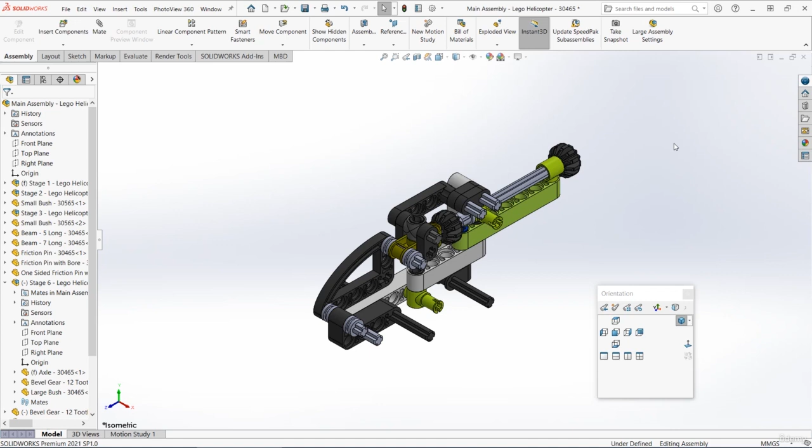Now that we've made those two new parts, we can start to make stage 12. As usual, we'll start with a small substage, so make sure you've got the parts that you need open. We should have the axle, the large bush, and the axle joint.

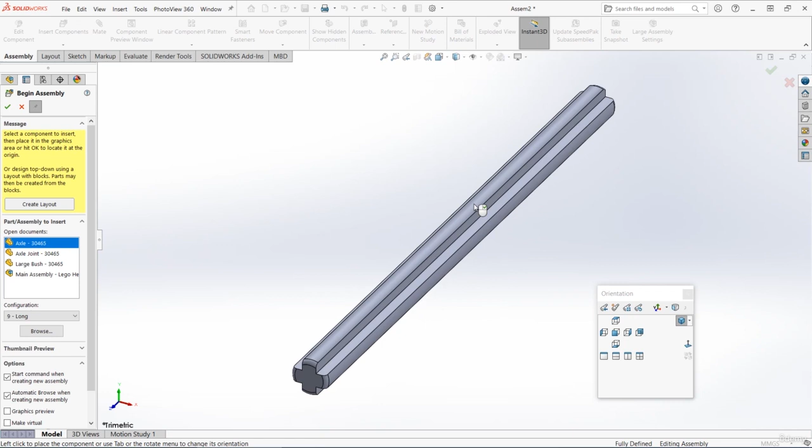I'm going to go to the axle, and go to File, Make Assembly from Parts. I'm going to pin the Insert Components menu open, and then insert the axle first, so that's fixed to the origin. It doesn't matter that it's the wrong size, we'll fix that in a moment, but first we'll insert the rest of the parts.

I'm also going to insert one more axle, and spin that around to the correct orientation. And then the axle joint, and that should be in this kind of orientation.

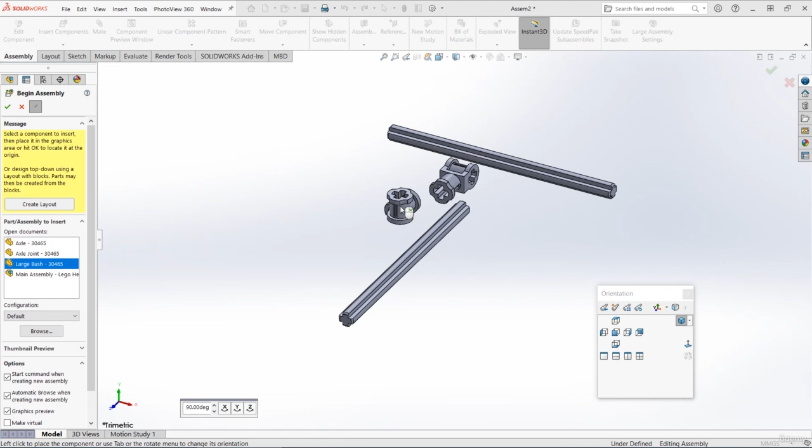Again, it doesn't matter if you don't get these exactly right because you can rotate them around when you're adding the mates. Finally, I'm going to insert that large bush as well, and spin it around like this. The end with the cuts should be facing downwards like this, facing outwards from the screen. But again, you can spin that around later on if you need to.

Now let's make these axles the correct length. Start with the fixed one, we'll make that 7 long. Click on the part and then from the drop down, choose the 7 long configuration, so it should be the one that's yellow in color. Then for this one at the top, we can click on it and that should be 3 long.

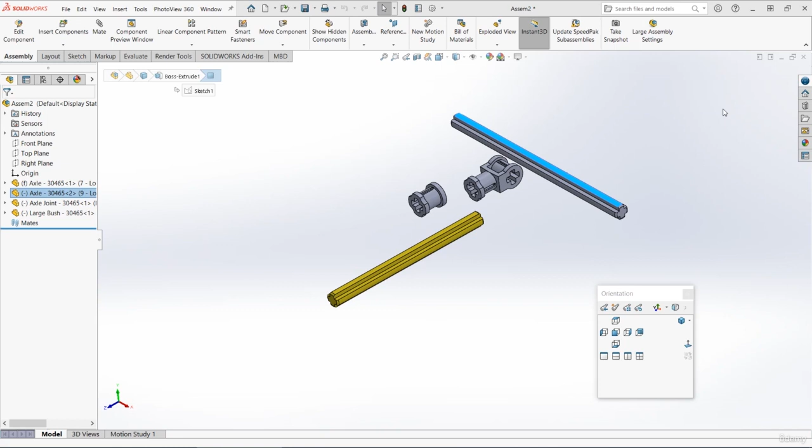Then we can just mate our parts together as usual. Let's select a circular face on the axle joint and then a similar circular face on the axle. Let's make those concentric and lock the rotation. If you find that your parts aren't lined up properly, you might need to select a flat face on the axle and a flat face on the joint and then make those parallel.

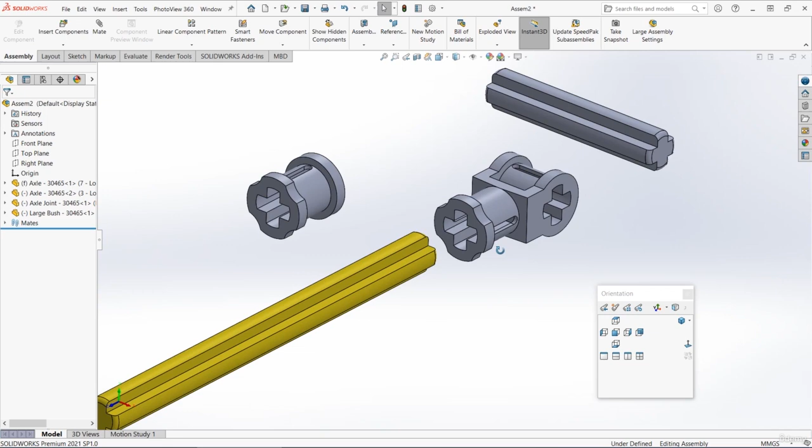And then for the position of the axle joint, I'm just going to drag it out so we can see inside it. Then I'm going to select this inside face at the top and also select this top face of the axle, and make those coincident just so they're touching.

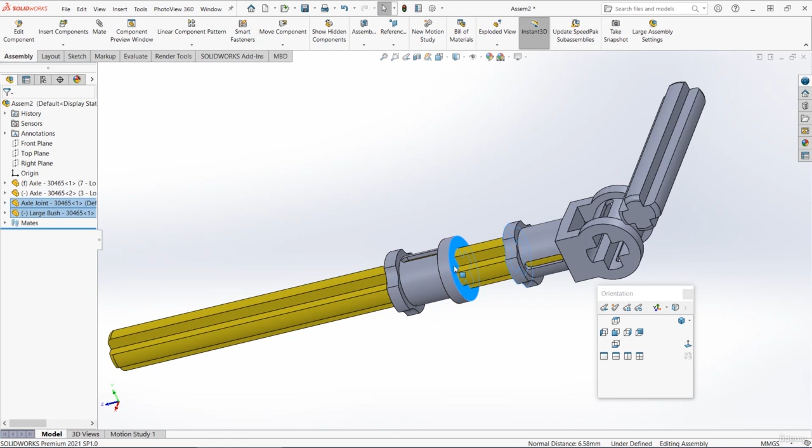Next, I'm going to make this large bush concentric with the axle joint. I'm going to lock the rotation again. Then I'm just going to drag it down and make those two faces coincident so that they're touching. As I mentioned, the end with the cuts should be facing down to the open end of the axle. It doesn't really matter too much if you get it the other way around, but that's just what the instructions say.

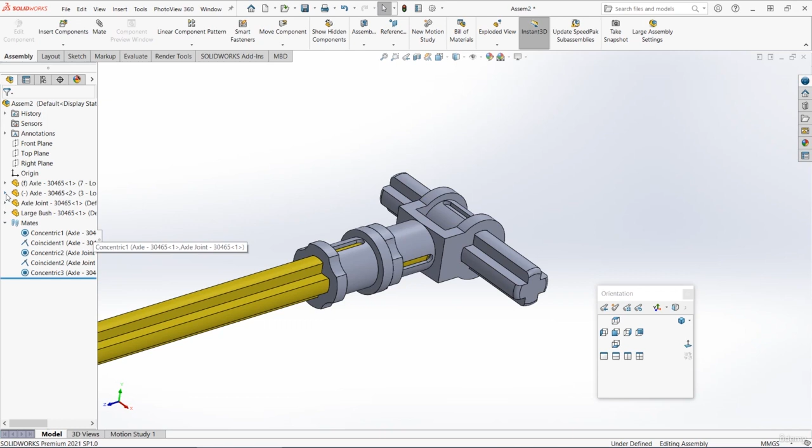And then finally, let's select that small axle and make that concentric with the axle joint. We can lock the rotation and then move it to the middle, mating it in place using the plane that goes down the middle of the axle and also the one down the middle of the assembly. So we should have something like this.

We've got the large axle, then on top of it we've got the axle joint with a small axle going through it, and underneath that we've got that large bushing just as a spacer. We can then save this sub-assembly.

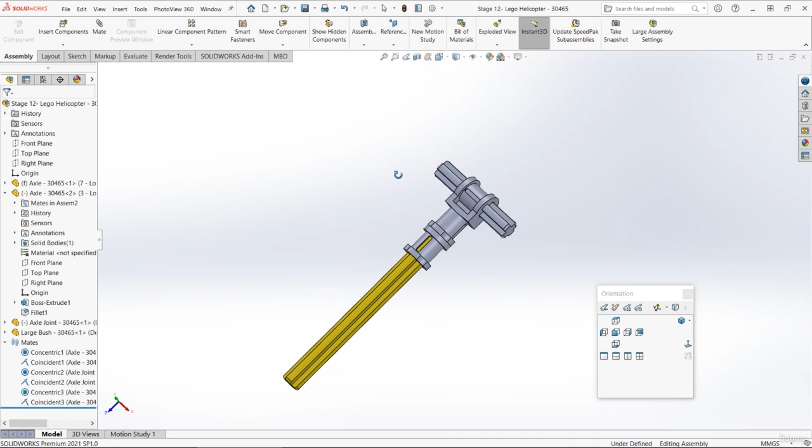This one should be called stage 12. We can now go back to the main assembly and insert this sub-assembly. Let's use Control and Tab, and then go to Insert Components. We'll find that latest stage 12 and insert that sub-assembly.

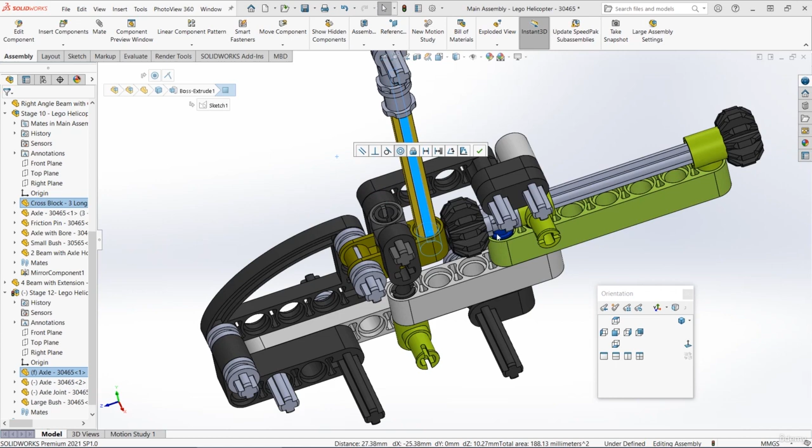The axle goes through this hole here. Rotate your model around and select that hole, and then also choose a circular face on the axle and make those concentric. Now we don't need to lock the rotation for these because we actually want this axle to spin round, and this is how the helicopter blades rotate.

Then let's just set the height, so let's choose this top face and then the corresponding face on the bottom of the bush, and make those coincident so they're touching each other. So you should see that this new stage 12 assembly can spin around within that hole.

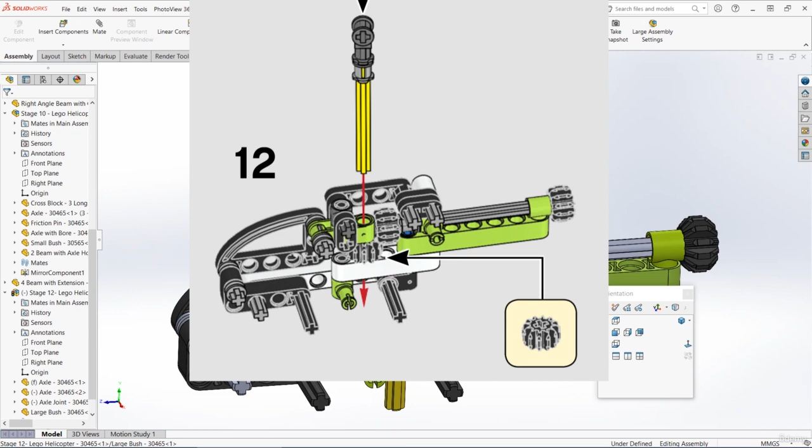Now if we look at the instructions, there's also another gear that goes in this gap here. In real life we have to insert this as we slide the axle through, but in SolidWorks we can just add it afterwards. To add that extra gear, let's copy one of the existing ones.

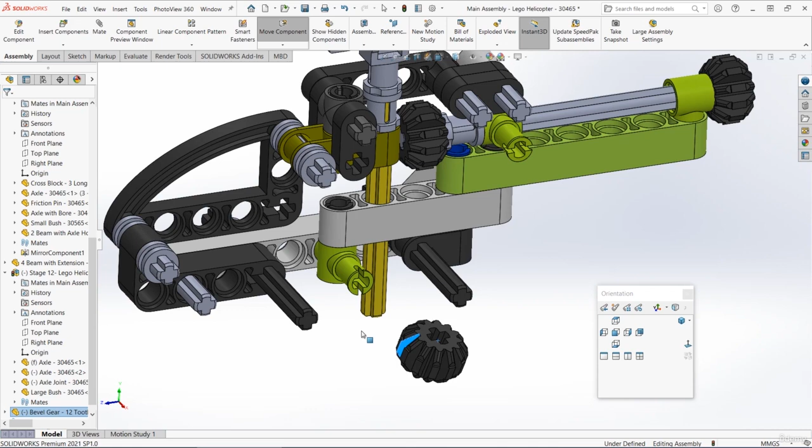Hold down Control, left click and drag from an existing gear, and then release to add that new part. First I'm just going to rotate it to about the right orientation. You can do this by holding down the right mouse button and dragging the part around.

Then let's select one of these circular inside faces and a corresponding one on the axle, and make those concentric. Now we do want to lock the rotation, but you'll probably find that your axle and your gear aren't quite lined up like this. So to fix this, let's just choose a flat face inside the gear, and also a corresponding flat face on the axle, and make those parallel.

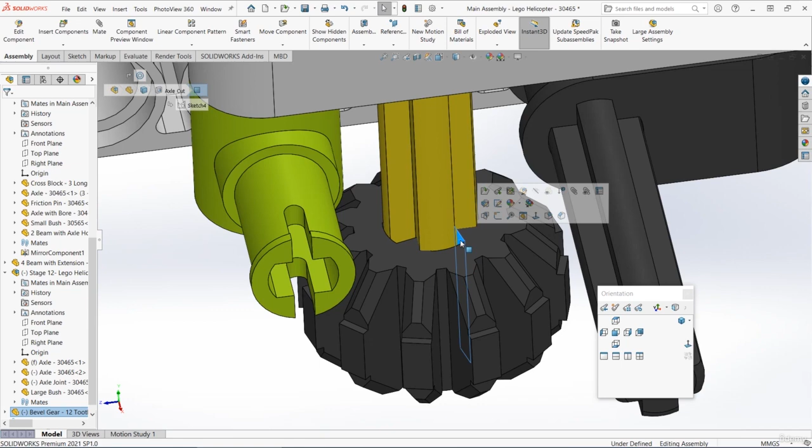We can then just move this gear up to the correct position. Let's put it in the middle here somewhere, and select this upper face of the gear and the lower face of the beam here, and make those coincident.

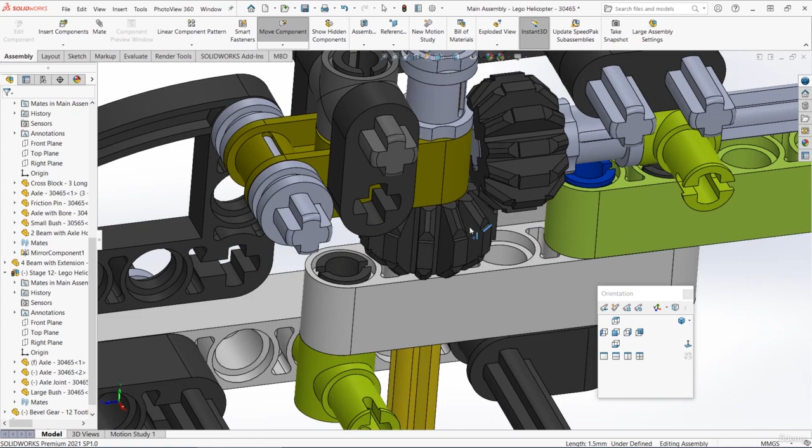So at this stage, these two gears aren't meshed together properly, so they don't actually affect each other, but that's something we'll fix once we've made the whole assembly. But for now, you can save your assembly and stage 12 is complete.